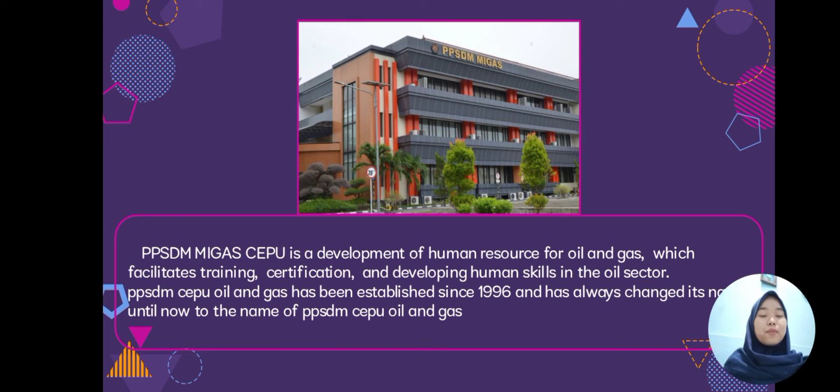This is a picture of PPSDM MIGAS CEPU office. PPSDM MIGAS CEPU is a development of human resource for oil and gas, which facilitates training, certification, and developing human skills in the oil sector. PPSDM MIGAS CEPU has been established since 1996 and has always changed its name until now to the name of PPSDM MIGAS CEPU. It is located on Jalan Sorogo, Karangboyo Village, CEPU District, Blora Regency, Province of Central Java.

At PPSDM MIGAS CEPU, there are three places that I visit during the job training: refinery unit, water treatment, and HSSE. First, I will explain about the refinery unit at PPSDM MIGAS CEPU.

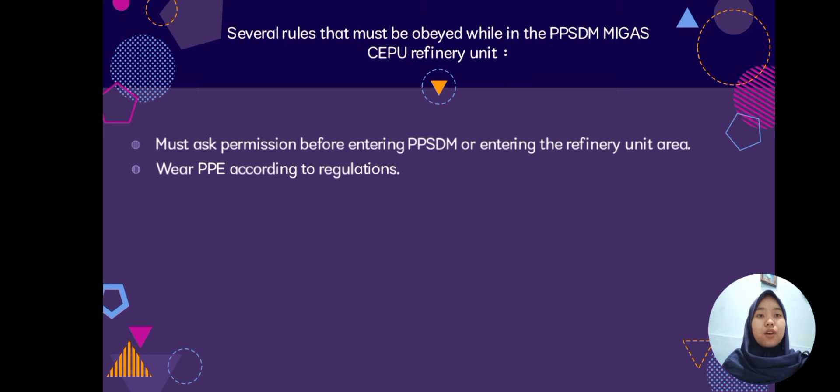In the refinery unit at PPSDM MIGAS CEPU, there are several regulations that must be obeyed. We must ask permission before entering PPSDM MIGAS CEPU or the refinery unit area, wear PPE according to regulation, and maintain attitude while in the refinery area, like not running, speaking loudly, or holding tools without instruction from a supervisor. It is forbidden to bring electronic devices into the refinery unit area.

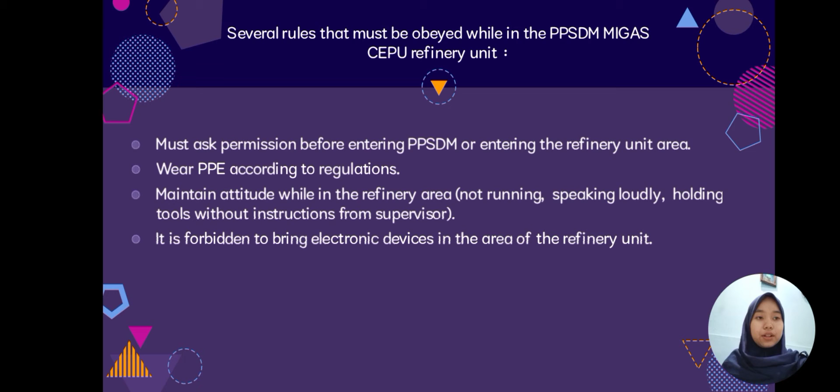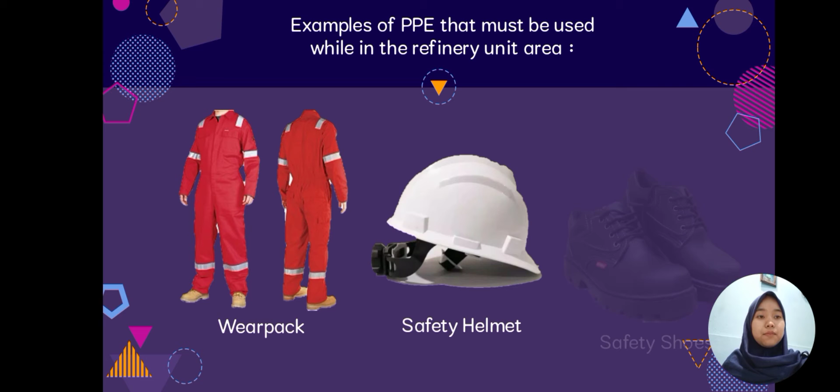Examples of PPE that must be used while in the refinery unit area are wearpack, safety helmet, safety shoes, gloves, and safety glasses.

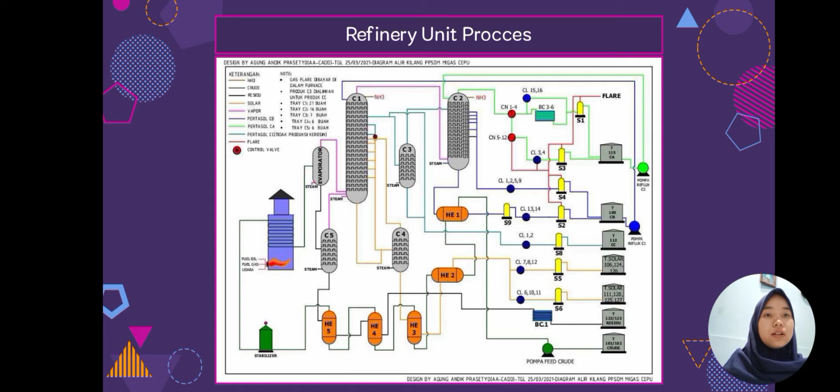This is a picture flow chart of the refinery unit. In the refinery unit area, we learn about processing crude oil into finished products such as Pertasol CA, CB, CC, residue, and solar.

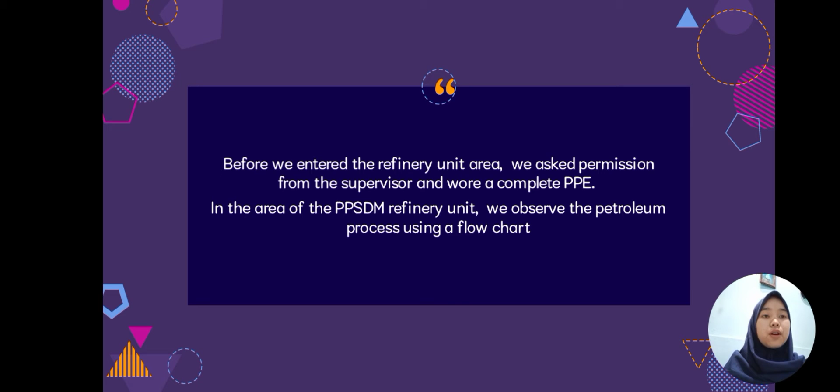Before we enter the refinery unit area, we ask permission from the supervisor and wear complete PPE. In the area of the PPSDM refinery unit, we observe the petroleum processing using a flow chart.

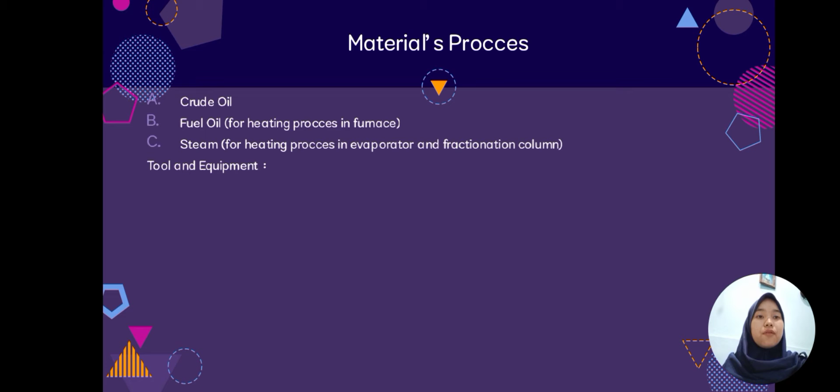Material processed in the refinery unit includes crude oil, fuel oil for the heating process in the furnace, and steam for the heating process in the evaporator and fractionation column. Tools and equipment include heat exchanger, furnace, evaporator, fractionation column C1 and C2, stripper columns C3, C4, C5, separator, and condenser. SOP: pump feed crude oil to the heat exchanger for preheating.

After being in the heat exchanger, crude oil goes to the furnace to be heated. After that, it goes to the evaporator column to be separated based on its fraction. The heavy fraction will go down, while the light fraction will go up.

After that, it's flowed to the fractionation column based on the fraction. Then the oil is cooled in the cooler and separated from the water in the separator, then stored in the storage tank.

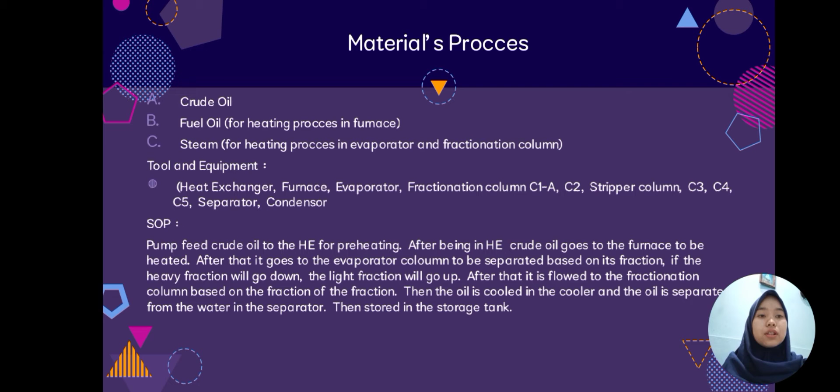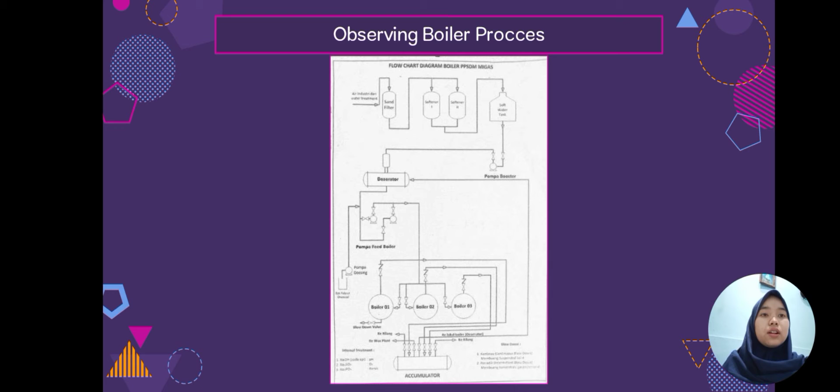Next, observing the boiler process. This is a picture flow chart diagram of the boiler in PPSDM MIGAS CEPU. Before entering the area, we ask permission and use full PPE. Here, we observe the water to steam process for the heating process at the refinery using a flow chart.

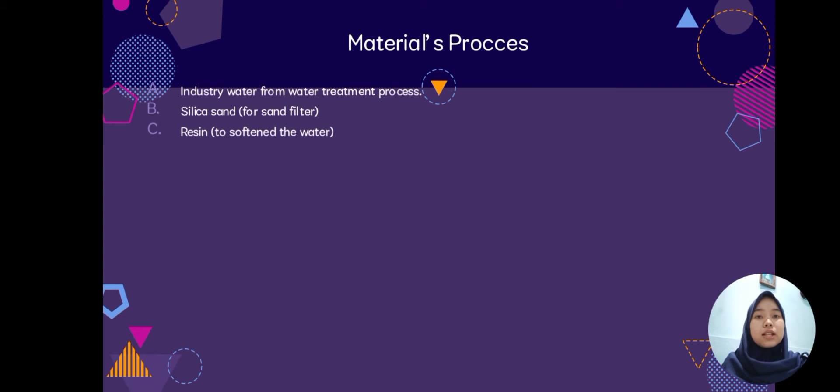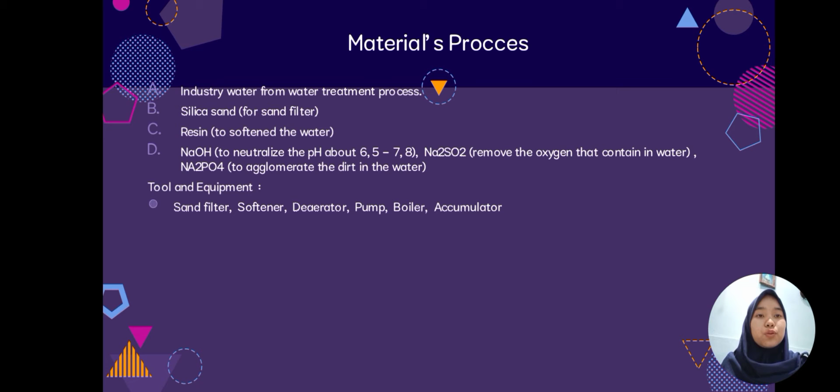Materials processed include industrial water from the water treatment process, silica sand for the sand filter, resin to soften the water, and NaOH to neutralize the pH to about 6.5 to 7.8. Na2SO3 removes the oxygen contained in the water, and Na2PO4 agglomerates the dirt in the water.

Tools and equipment: sand filter, softener, deaerator, pump, boiler, and accumulator. Product result: steam. SOP: first, industrial water from the water treatment is given to the sand filter to be filtered using silica sand.

After that, it flows into the softener to soften the water, then is accommodated in the softener tank. Then it's pumped into the deaerator to remove the oxygen contained in the water. After that, it's pumped to the boiler by injection of chemicals.

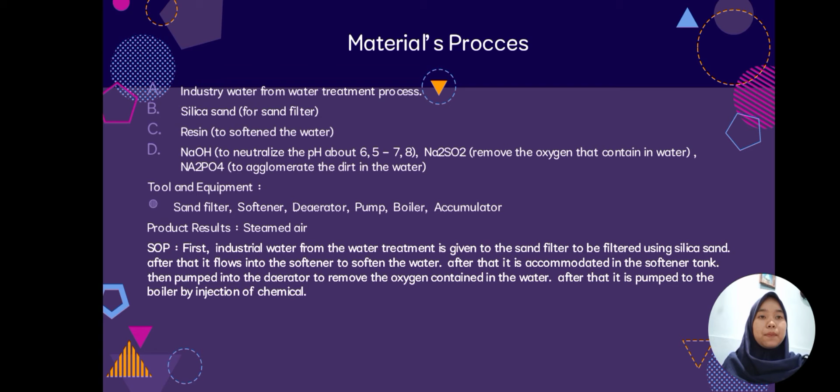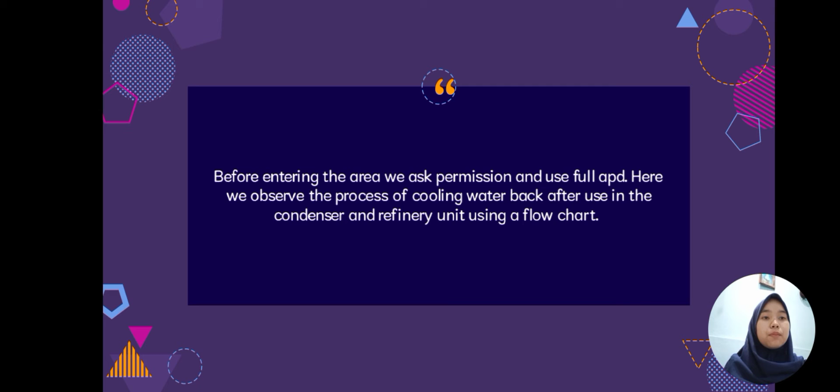Next, the cooling water process. Before entering the area, we ask permission and use full PPE. Here we observe the process of cooling water after use in the condenser and refinery unit using a flow chart.

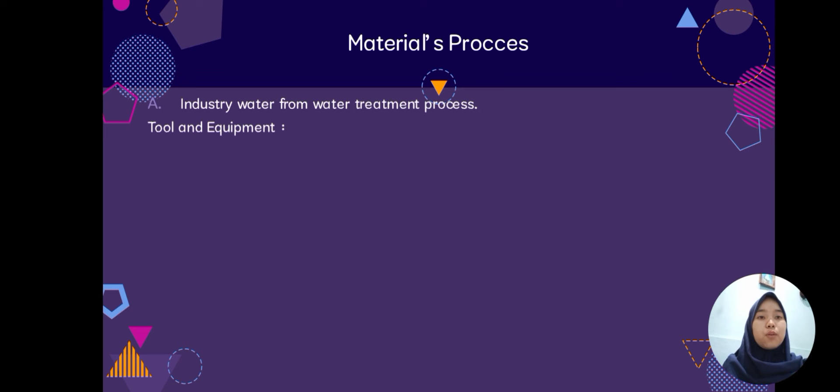Materials processed include industrial water from the water treatment process. Tools and equipment: hot tub, cool tub, and cooling tower in the middle, and pump. Product result: cooled water. SOP: hot water from the condenser is pumped into the cooling tower to be dropped like rain to cool the water. After that, it is accommodated in a cold water basin and flowed back to the condenser cooler box.

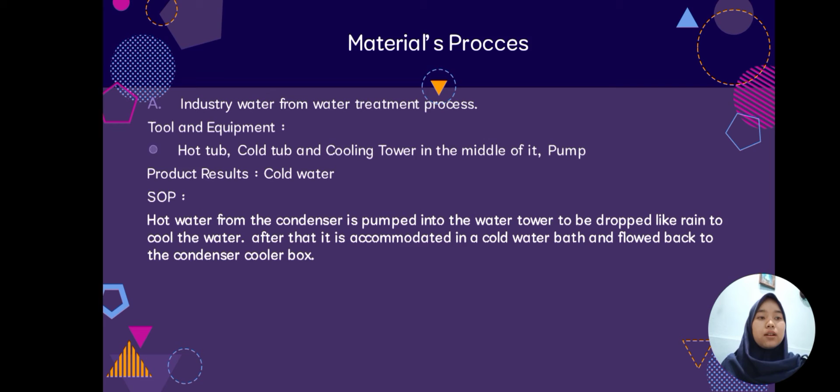Next, I will explain about the water treatment unit.

First, we had to ask permission and wear PPE with additional gloves so as not to be exposed to chemicals. This process is to process dirty water from Bengawan Solo into clean water to be processed at the refinery unit and for the needs of local residents.

We can observe directly and using flow charts.

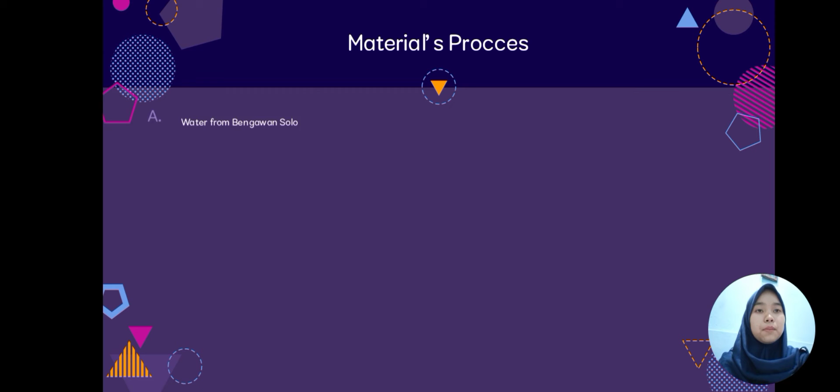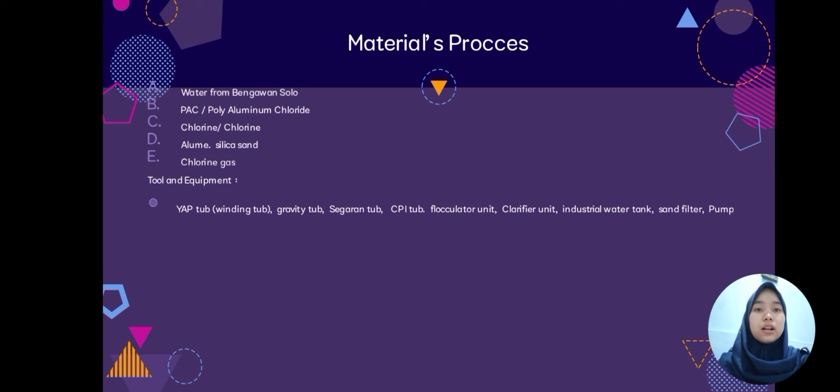Material process: A, water from Bengawan Solo; B, PAC or polyaluminum chloride; C, chlorine; D, alum, silica sand; E, chlorine gas. Tools and equipment: YAP tub or winding tub, gravity tub, segaran tub, CPI tub, flocculator unit, clarifier unit,

industrial water tank, sand filter, and pump. Product results: drinking water, industrial water for process units, and water for firefighting units.

SOP: pump water from Bengawan Solo to these two places, 60% for the YAP tub and 40% for the segaran tub.

In the YAP tub, add chemical water, and the water will mix naturally because the tub is tortuous. Then, flow and store the water in the YAP tub to the gravity tub.

After that, the water is flowed to the sand filter for the purification process and given chlorine gas to kill bacteria. Then the water is flowed for drinking water.

In the segaran tub, divide the water first for the firefighter unit and second for the CPI tub. After that, the water in the CPI bath is flowed to the flocculator unit to get the mixing process using alum. The dirt in the water will be separated because of the alum.

After that, the water is flowed into industrial water tanks and distributed to the refinery unit.

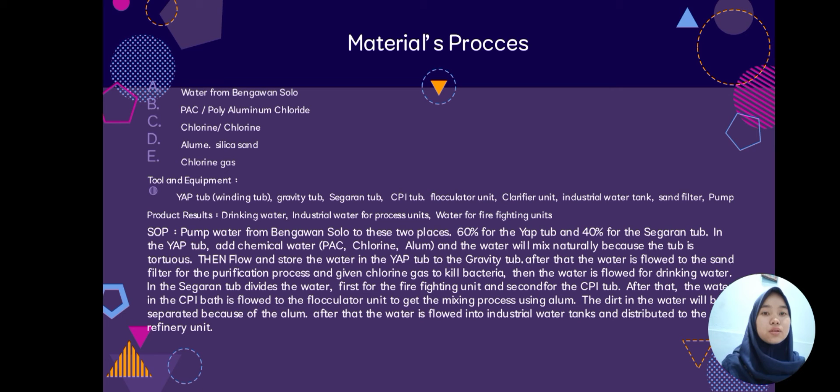Last, I will explain about the HSSE unit, or Health, Safety, Security, and Environment. In HSSE, I got material about work safety.

There we also have to use full PPE. They are wearpack, safety helmet, safety shoes, and gloves.

The important rules to follow in this area are: 1. Don't touch any equipment in the HSSE unit area before obtaining permission. 2. Don't play around and run around the HSSE unit area. 3. Don't speak loudly in the HSSE area. 4. Use PPE. 5. Get permission before entering the

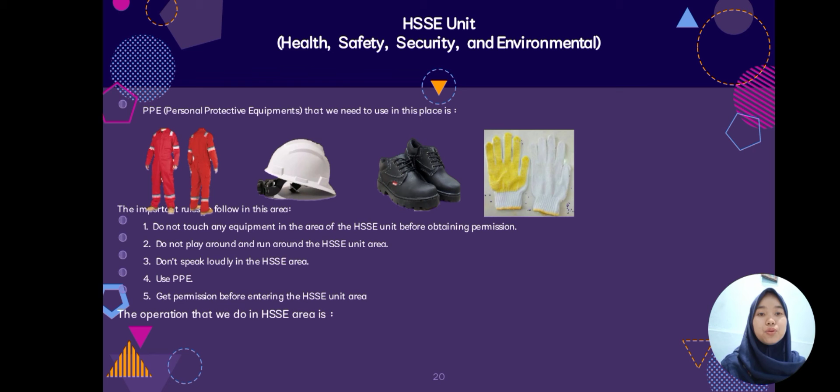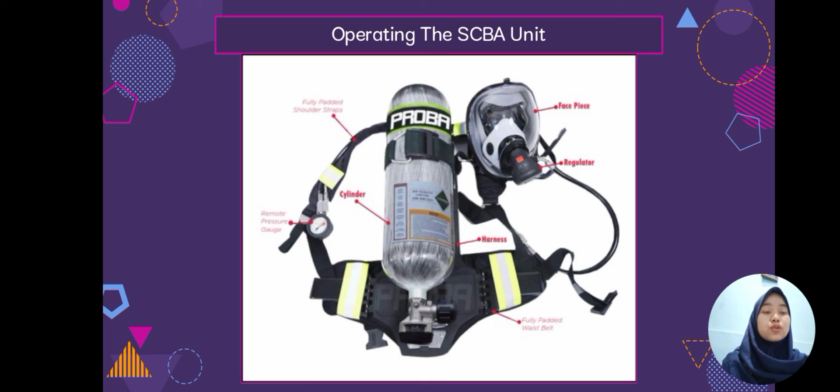HSSE unit area. The operation that we do in the HSSE area is operating the SCBA unit. This is a picture of the SCBA tools.

First, we have to ask the supervisor for permission. When we try to use SCBA, we don't use full PPE, but for the actual process we have to use full PPE.

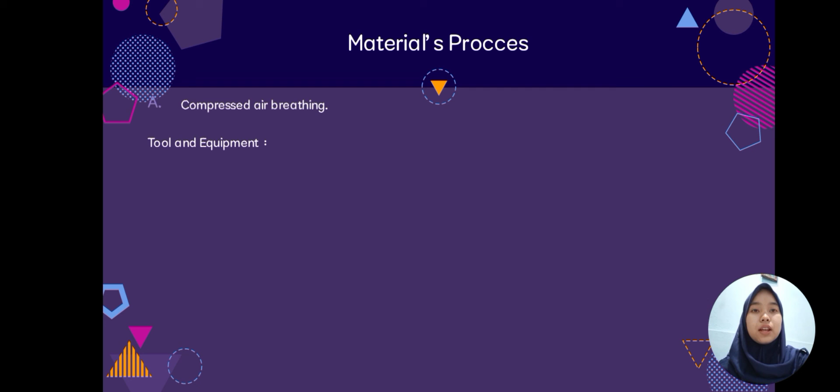Material process: compressed air breathing tool and equipment, SCBA unit, and SCBA unit SOP.

First of all, open the valve in the cylinder with a pull and twist technique. Check the pressure on the pressure gauge. If the needle arrow goes up, it means that the air in the cylinder is still full. But if the needle arrow does not move, it means the air in the cylinder is empty.

If the needle arrow is red and the warning whistle continues to sound, it means the air reserve is running low. If everything is secure, wear the SCBA on your back, and fasten your belt and shoulder straps.

Attach the regulator with a face mask. After that, take a deep breath to let the air out of the cylinder into your mask. After taking a deep breath, the air will flow into your mask and you can breathe normally.

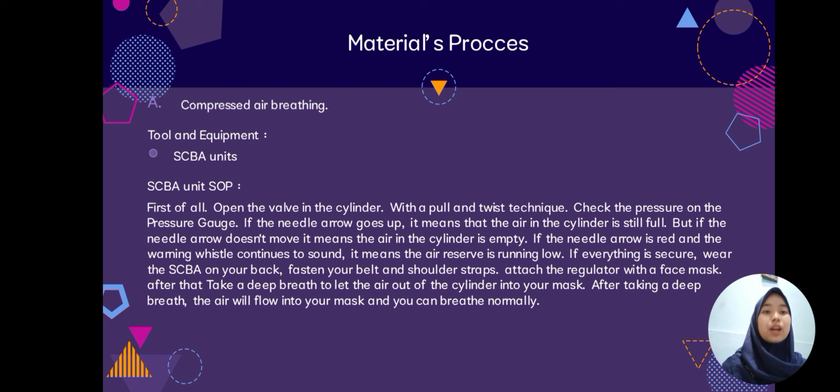Conclusion: after I did the job training at PPSDM MIGAS CEPU, I was able to learn about the work system at PPSDM MIGAS CEPU, including oil processing, clean water, and work safety. While doing the job training there, I could also feel what real work in the oil industry is like.